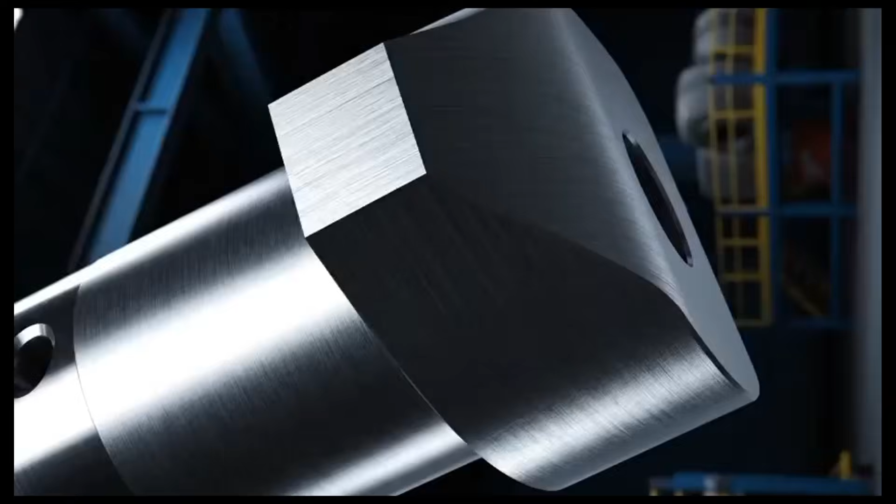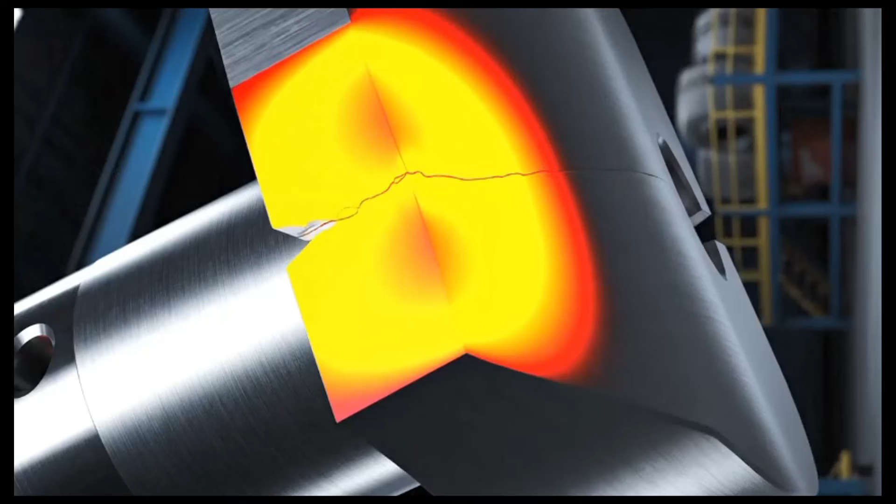Any tiny corner can destroy an entire machine. Not because the material is weak, but because stress becomes trapped in one small area. This hidden engineering problem is called stress concentration. Today, you'll see why mechanical parts fail near holes, corners, and keyways, and how engineers prevent catastrophic failures using simple design changes.

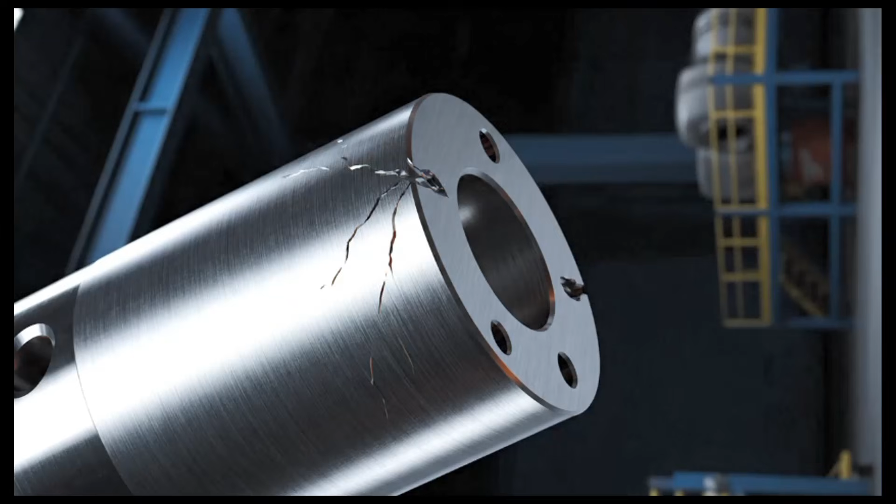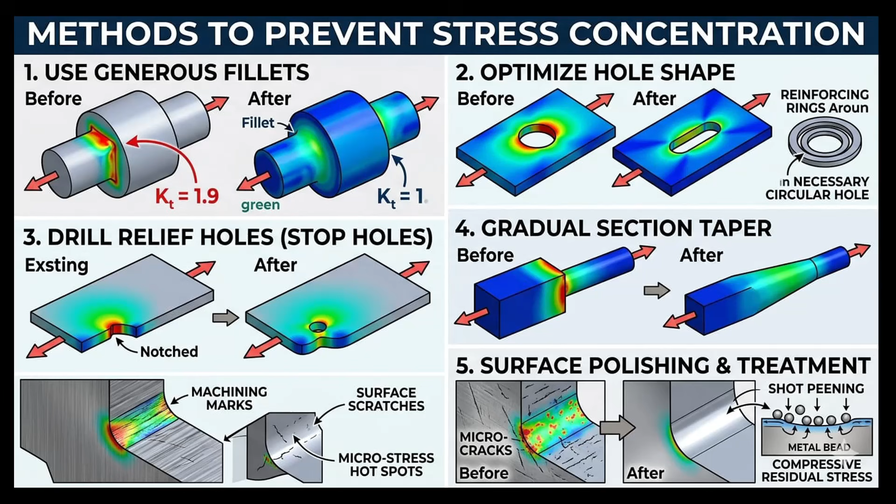When force acts on a smooth component, stress distributes evenly. But the moment we add a hole, sharp corner, groove, or sudden shape change, the stress flow gets disturbed. Instead of spreading smoothly, stress gets crowded into a tiny region. That region experiences much higher stress than the rest of the component. This phenomenon is called stress concentration, and this is exactly where cracks begin.

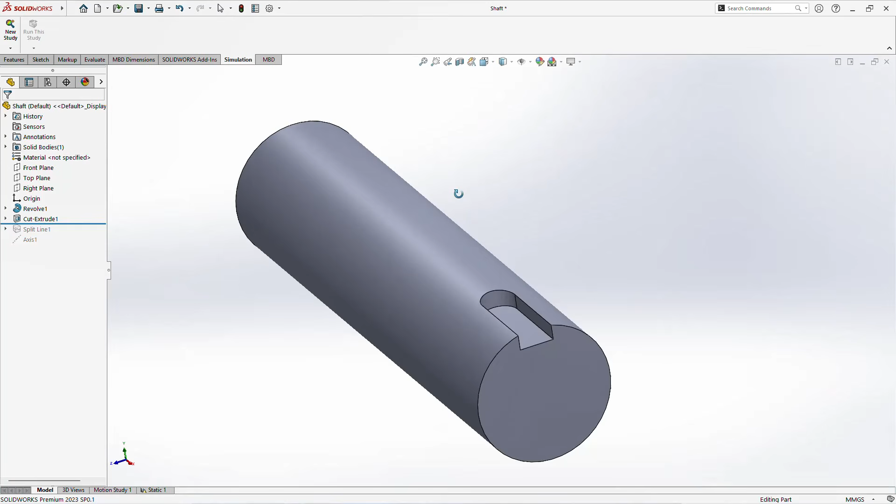Look at this rotating shaft. Everything seems normal, but near the keyway, stress repeatedly concentrates during rotation. Tiny microscopic cracks start forming. With every cycle, the crack grows larger. And one day, complete failure occurs.

This happens in shafts, gears, welded joints, bolt holes, aircraft structures, bridges, and even smartphone frames. Most mechanical failures start from stress concentration zones, not from the center, not from smooth surfaces, but from geometric discontinuities.

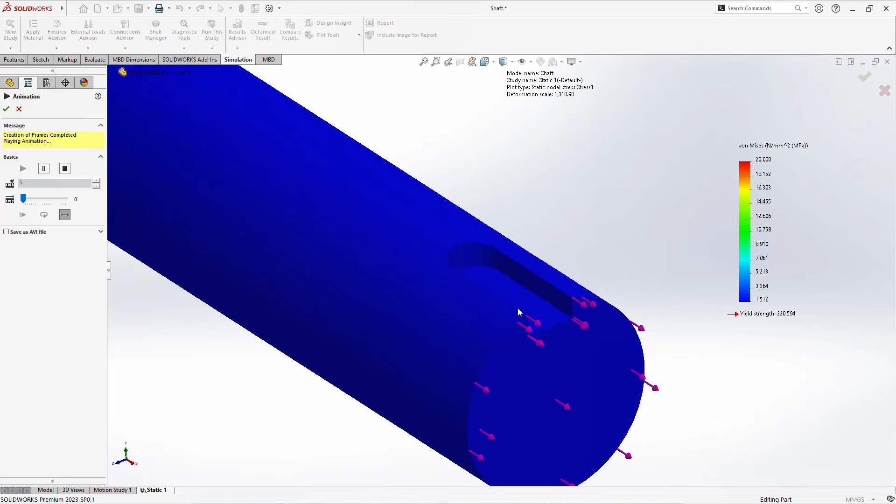Method 1: Add fillet radius. This is one of the most powerful solutions. Sharp corners trap stress. Smooth fillets allow stress to flow gradually. Larger radius means lower stress concentration. That's why engineers avoid sharp internal corners.

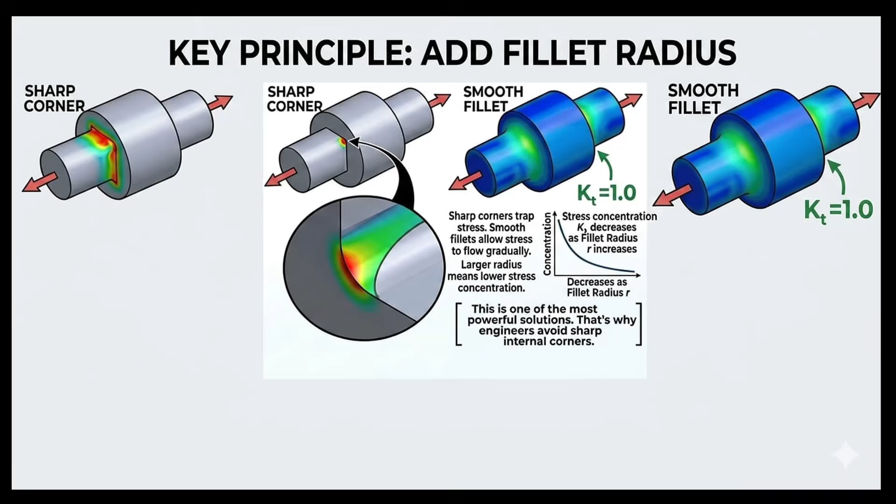Method 2: Avoid sudden section change. Sudden diameter reduction creates stress spikes. Instead, use smooth transitions. Stress prefers gradual geometry changes.

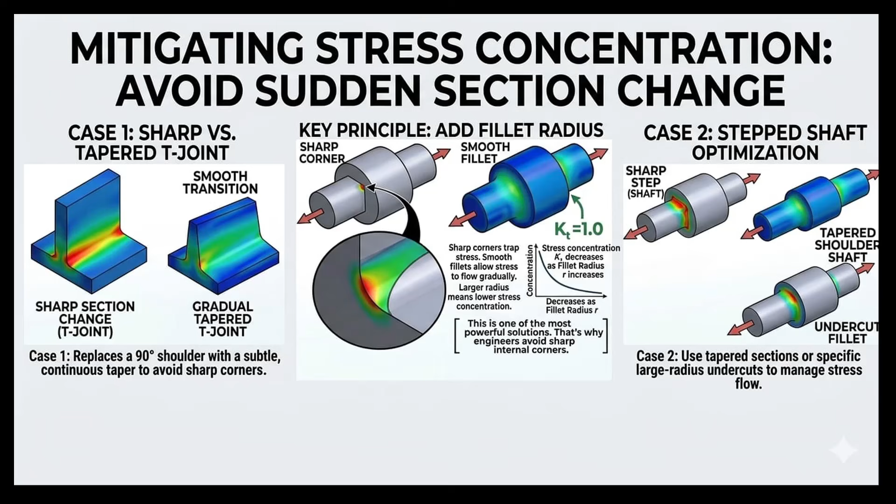Method 3: Improve surface finish. Surface roughness behaves like tiny cracks. Polishing and proper machining reduce crack initiation. Better finish means better fatigue life.

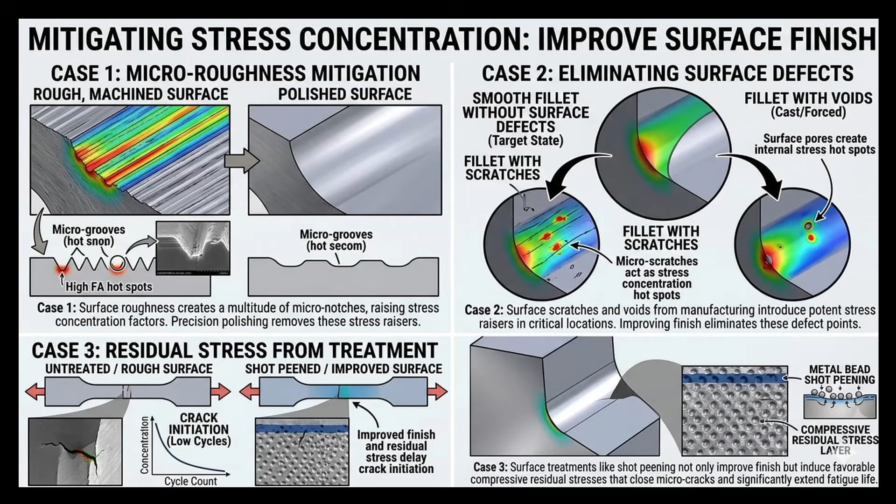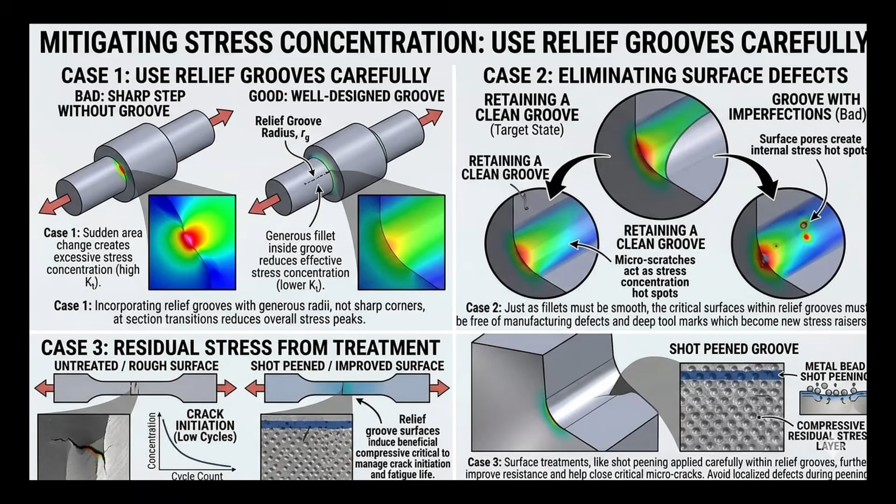Method 4: Use relief grooves carefully. Proper groove design redistributes stress. Incorrect groove design can increase failure risk. Even small geometry changes matter in machine design.

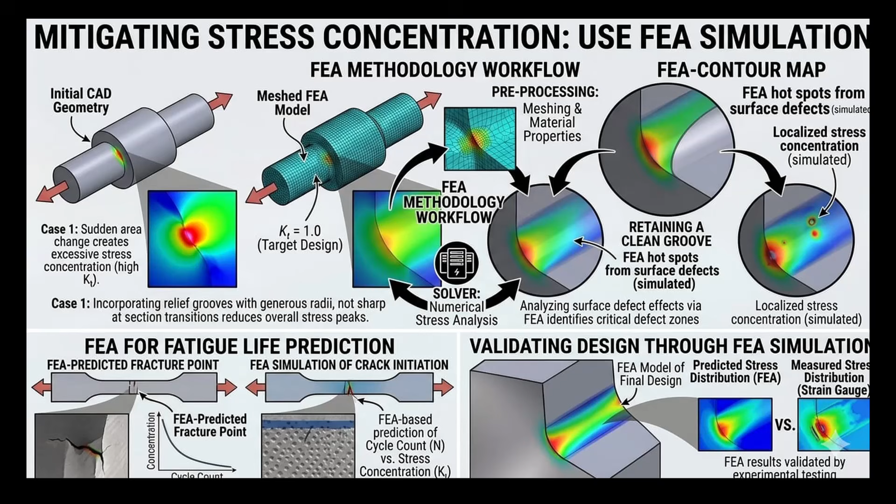Method 5: Use FEA simulation. Modern engineers use finite element analysis to identify dangerous stress zones before manufacturing. FEA helps optimize shape, fillets, and material selection. This saves cost and prevents real-world failures.

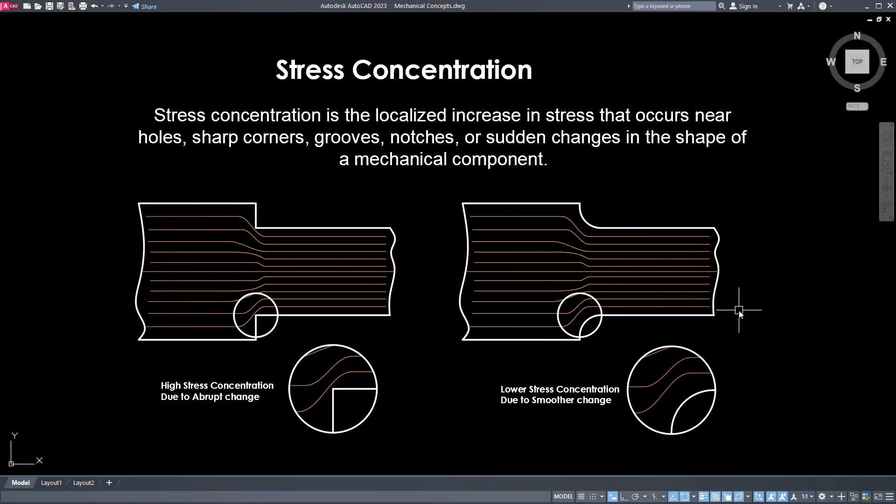So remember this: machines rarely fail randomly. Most failures begin from stress concentration areas. A tiny sharp corner can become the starting point of catastrophic failure. And sometimes, adding just a small fillet radius can increase component life dramatically. That is the power of smart mechanical design.